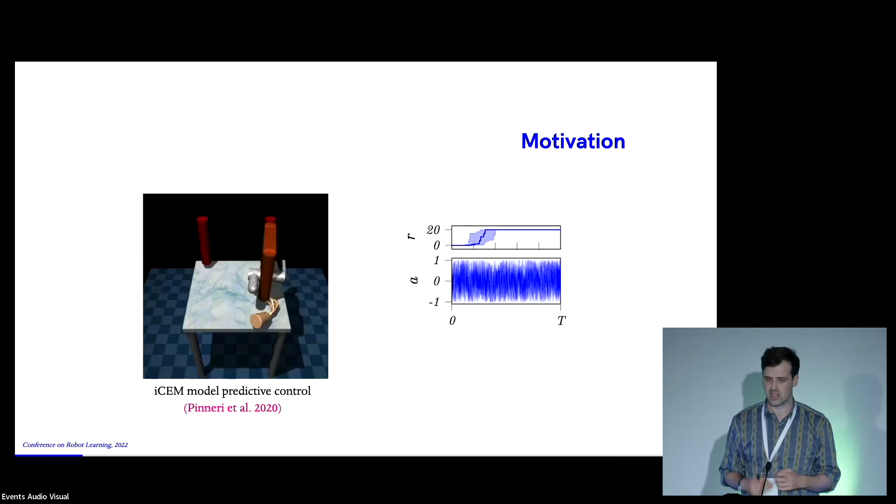So what we looked at in this work is bringing in Gaussian processes as a distribution over action sequences, using the correlations between actions in time to incorporate smoothness in the robot control during the optimization.

To explain where these correlations come in, I want to give a brief overview of how sample-based control works.

What we're doing is open loop control over a finite time horizon, and usually we specify some parametric action distribution. In order to explore, we sample from a joint distribution over action sequences. Here's a key detail: in this joint distribution is all the correlations that capture smoothness.

One key issue with a lot of implementations is that people make this independence assumption in time, which gives you IID random noise for exploration, and results in rough trajectories that you have to use for optimization.

Then in order to improve, you need some kind of weight per action sample. This can be soft weighting or hard weighting. Then to do the next iteration, you project these weighted samples back to a parametric distribution. This is the other key step, because in order to preserve this smoothness, you need to capture all the correlations from your iterates in this parametric distribution.

We take the inference perspective because it gives you a very elegant way of thinking about where these weights come from. And Takayuki talked about it a lot earlier. In the episodic setting, we're optimizing for the return.

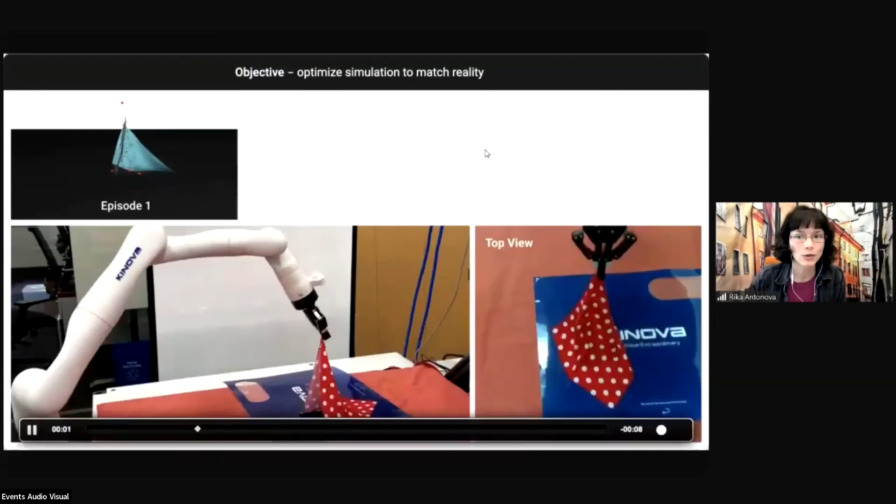In this work, we call for rethinking optimization with differentiable simulation from a global perspective. We consider a variety of optimization problems, including policy optimization tasks with highly deformable objects and liquids, as well as real-to-sim tasks where we optimize the behavior of simulated objects to match reality.

Our contributions are differentiable simulation environments with various objects and interactions, analysis of optimization landscapes and gradients, and a global search method for optimization on rugged loss landscapes.

We construct several new scenarios with rigid objects, a particle-based simulation with fluid, and mesh-based simulations with highly deformable objects. We also incorporate a number of particle-based environments from the Plasticine Lab that simulate plastic deformation.

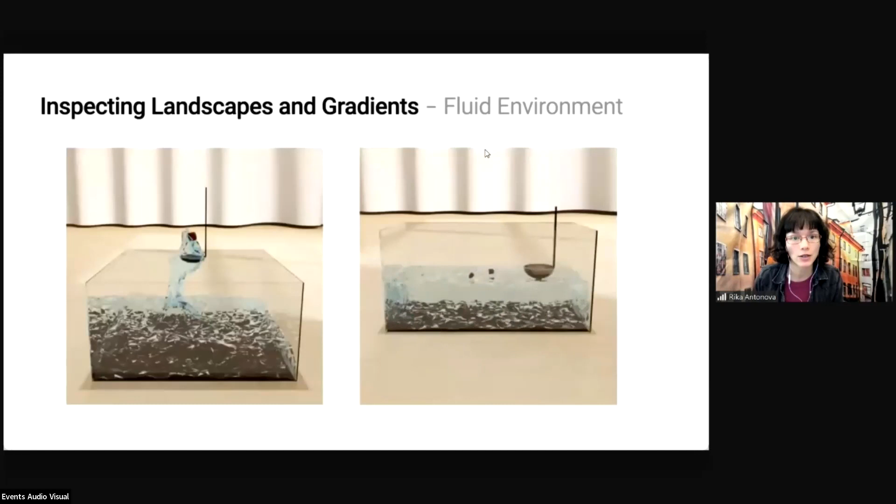We challenge the assumption that differentiable simulators provide easy optimization landscapes in sufficiently interesting scenarios. Our visualizations of loss landscapes uncover numerous local optima, as you can see here in examples from our fluids scenario. Here's an example of a landscape with flat plateaus, showing the need for extending gradient-based methods to have global search.

We propose an approach that uses Bayesian optimization to explore the loss landscapes globally. It models uncertainty over the loss using a Gaussian process and reduces the uncertainty by exploring unseen regions. At each global iteration, Bayesian optimization proposes the next vector of simulation or control parameters to try.

We treat this as a starting point for what we call semi-local leaps. We first sample a population of K candidates. Then from the best candidate, we compute the starting point for the gradient descent. The gradient descent, which we call the leap part of the method, proceeds, since on smooth loss landscapes it can make fast progress towards an optimum.

When the gradient descent reaches the local optimum, we again sample K candidates in a gradient-free way, from the Gaussian distribution whose mean and covariance are computed using covariance matrix adaptation equations. Then we again compute the descent start and proceed with the descent, and so on.

In the outer loop, we update the Gaussian process posterior for Bayesian optimization, and then Bayesian optimization selects the next point to try globally. It ensures we return to low loss regions to further improve within the promising areas of the search space.

In the experiments, we first show that gradient-based methods can offer significant gains compared to gradient-free approaches, such as CMA-ES. Here's an example with a 3-link pendulum that has to reach the blue dot.

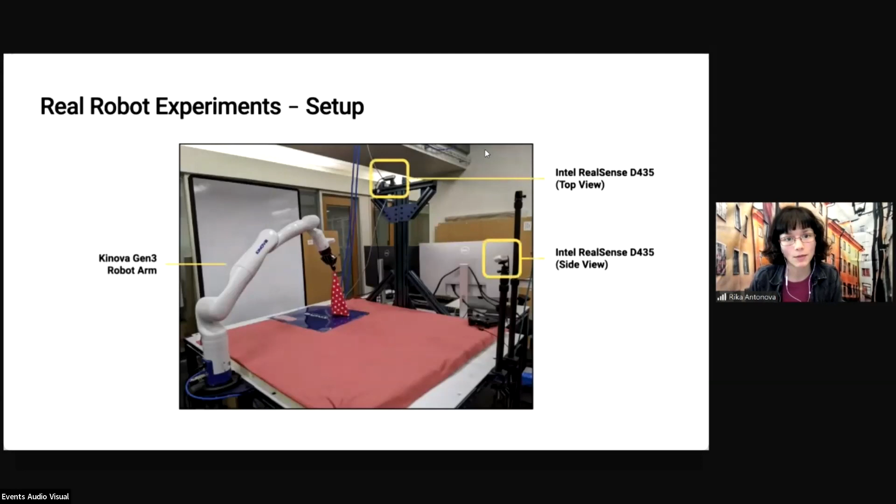Our setup for the real-to-sim experiments consists of a Kinova Gen 3 robot arm, two RealSense depth cameras, and a deformable object. Here the objective is to optimize the deformable cloth in simulation to match reality.

The loss is computed based on the distances to the four corners of the simulated cloth, which we also annotated in the real point cloud. Here's an extended version where we've increased the number of parameters to optimize.

Gradient-based methods can succeed in matching the overall motion for this highly deformable cloth.

Next we study the motion of cloth that behaves more like a paper towel when lifted, so it's stiffer. Here some dimensions of the loss landscapes are relatively smooth, but others can be quite rough in some scenarios.

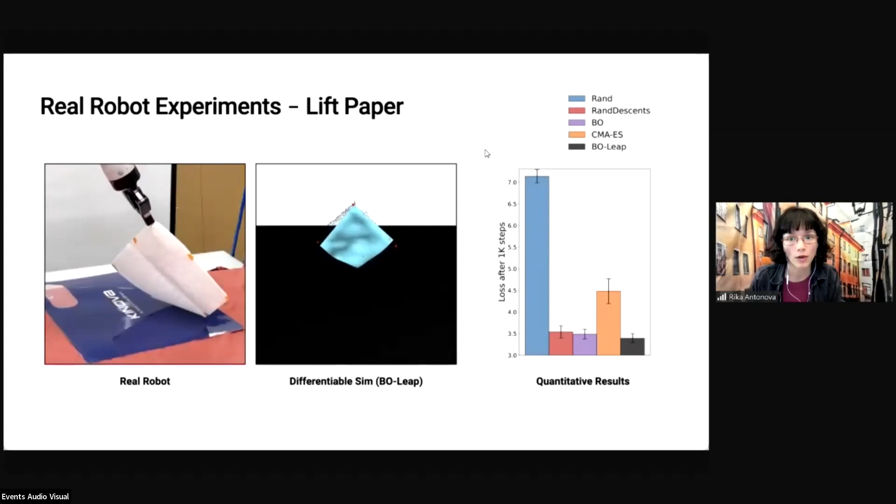Nonetheless, gradient-based methods can still perform well and find the parameters for the deformable that make it roughly match the paper motion. Here's also the visualization of the performance where we have the extended version when we double the number of parameters to optimize.

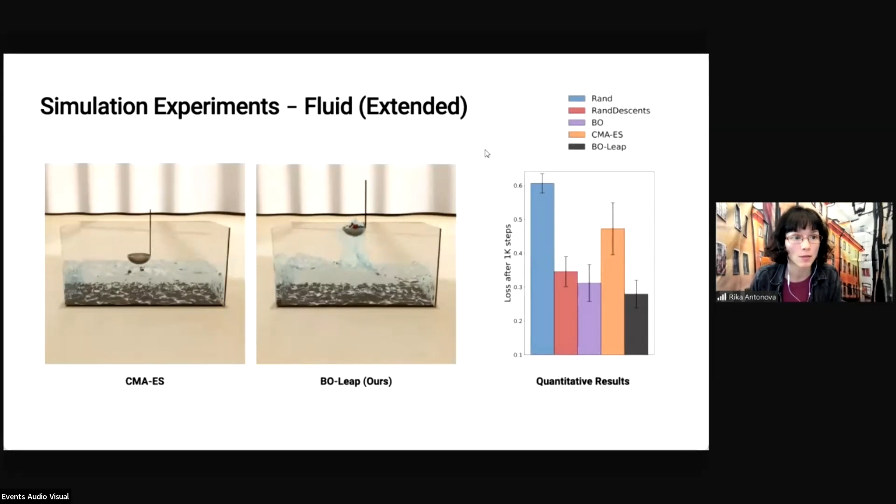Next, we study the fluid scenario where the goal is to lift up the sugar cube from the liquid. We also have an extended version where we lift up two sugar cubes. Here our method outperforms other gradient-based and gradient-free methods in this task.

The next set of experiments deploys the policies we optimized, but now on hardware. BO leap here lifts up both cubes in 7 out of 10 runs. BO is the closest competitor, Rand with descents, succeeding in 3 out of 10 runs.

CMA-ES could lift 1 of 2 cubes in several runs, but it failed to lift up both cubes in any run. It often also failed to lift even a single cube.

In these experiments, as you can see, we use a smaller container for liquid to avoid spills, and we use foam instead of sugar for the cube, but the motion of the cube in liquid is similar to simulation. So the setup retains the challenge of keeping both cubes within the ladle, and here we're showing an example of a failure of both tasks.

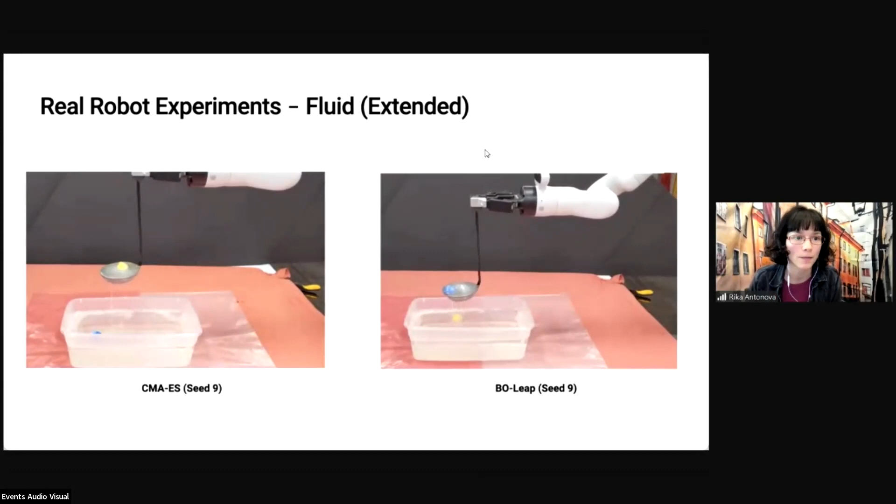Both of the algorithms. So we were asked to provide a kind of dirty laundry list. Our first note here is that we like the cinematic rendering, but it is slow.

So internally, we're using a faster renderer that gives us an idea of what is happening with the simulation, but of course it takes much less time to render.

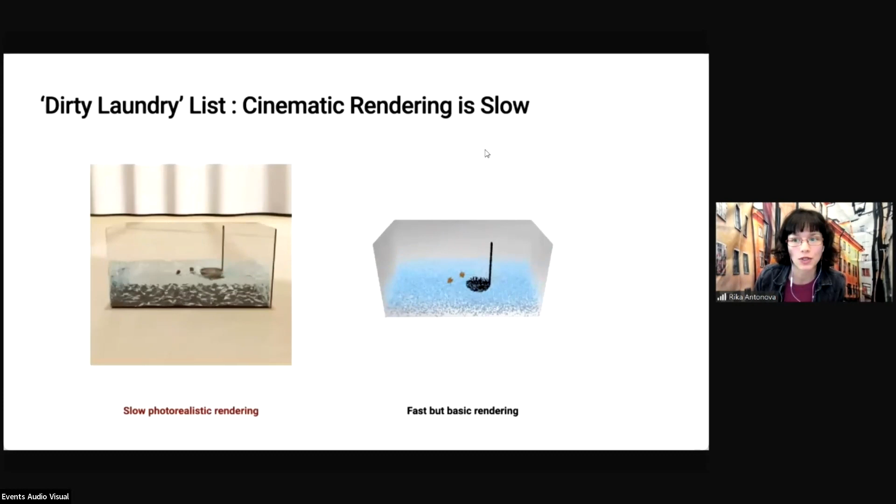From the algorithmic side, the biggest headache is that matrix decomposition for CMA-ES, BO, and therefore also BO leap, causes non-determinism. This can sometimes compound to basically have instabilities that result in plots that look different between runs.

For these slower environments, we can only afford to run 10 seeds if we have many environments to experiment with and many algorithms to compare. So rather than basing our conclusions on how algorithms perform in a particular environment, we now tend to look at the bigger picture of how things perform overall across a wide range of environments.

All right, so now the dirty laundry list is done, and there's still something to note, not really about our work in particular, but generally about differentiable simulators. The biggest challenges here arise due to difficulties in differentiating through rigid contacts.

With the pinball scenario, we studied this issue by varying the number of contacts, by changing the number of colliders in this game. And here's another example.

This time, the contact between the rigid and highly deformable object yields a rough landscape and low quality gradients, despite the fact that the dynamics of the environment appear well behaved.

So overall, to summarize, the messages we would like to communicate with our work are as follows. The first takeaway is that well-behaved dynamics does not necessarily yield smooth loss landscapes and useful gradients.

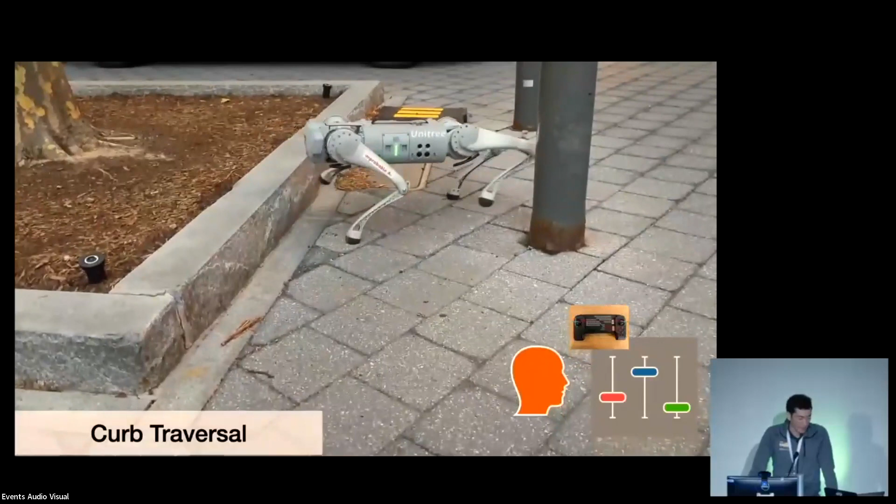Thus, when we take MOB outdoors, a human pilot can take a few attempts in the new environment to find a successful behavior in the parameter space.

This idea holds promise for piloting the robot in situations that are hard to simulate, like thick bushes and complex terrain.

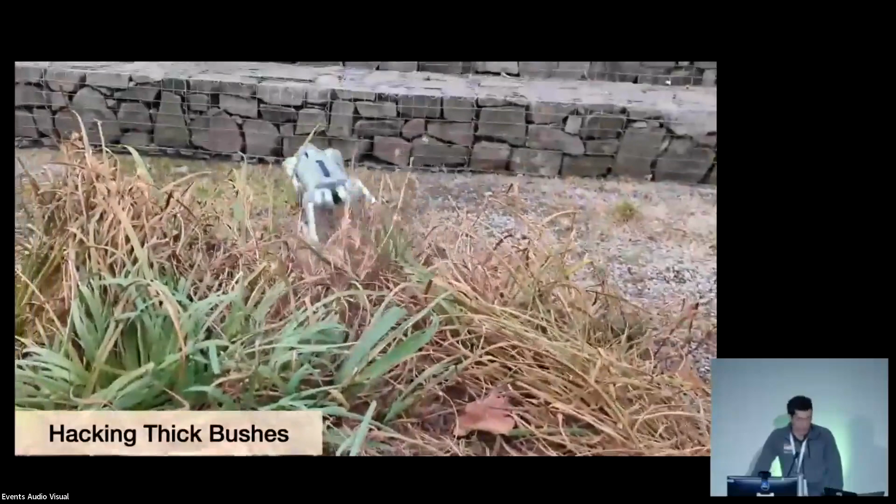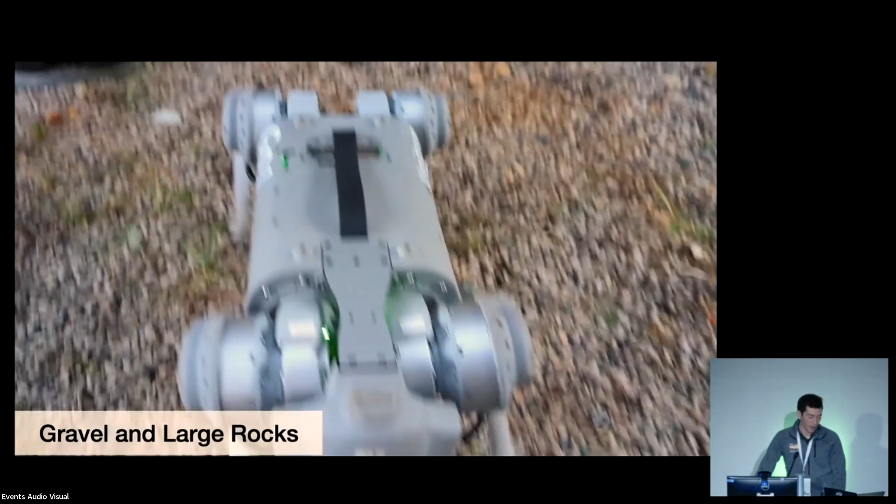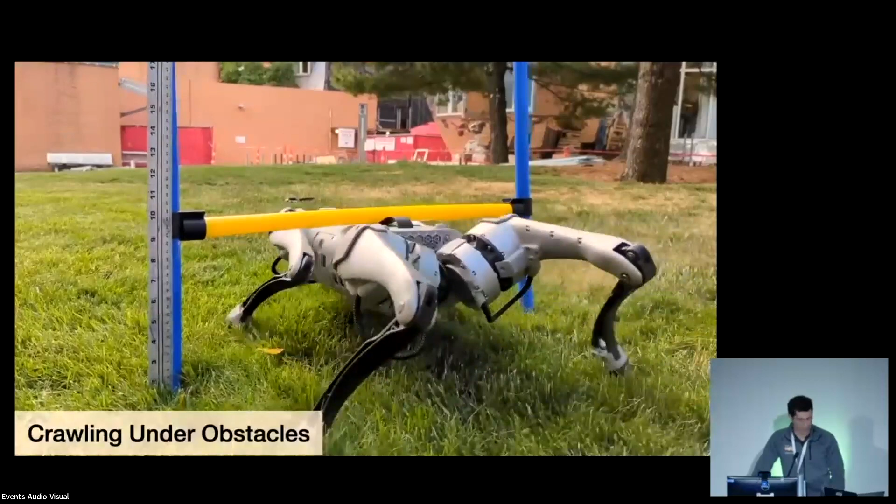Until now, we have shown that MOB can learn diverse behaviors for a single task. Now the question is, can we transition from skill 1 to skill 2? The answer is yes. We show that MOB learns to compose multiple behaviors in sequence. By the way, this is a natural consequence of learning continuously parameterized behaviors in a single policy. We don't need to do anything special during training.

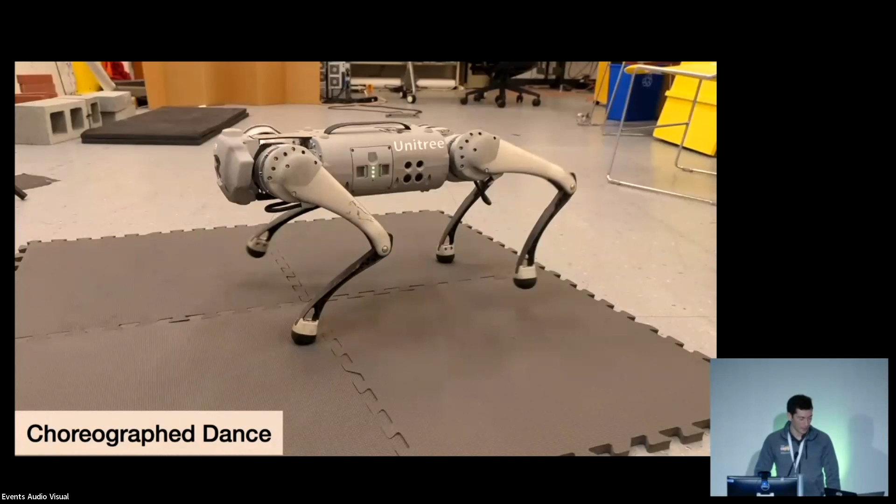This even serves to compose motions with precise timings and high speeds. Here, the robot's foot contact timings are precisely choreographed to music. Sorry, there's no audio on this one.

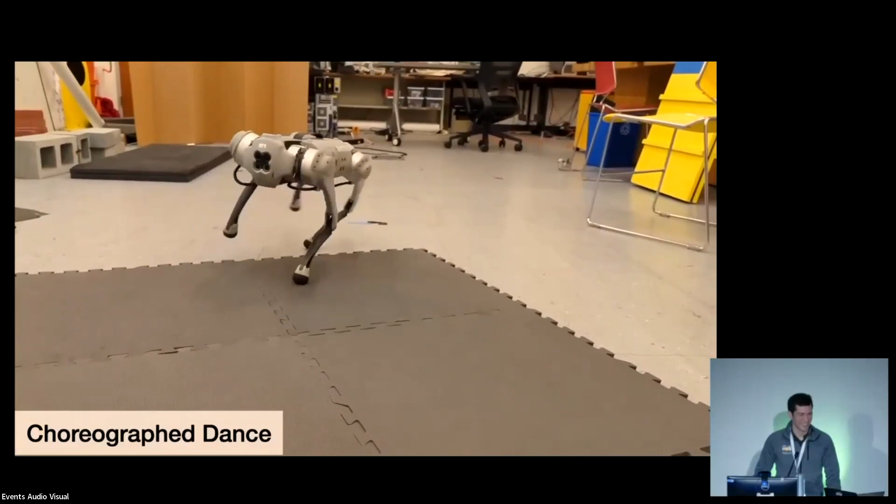So, what are our takeaways? First, MOB provides a procedure for learning a structured space of locomotion behaviors for each locomotion task. The diverse behaviors learned by MOB impact performance in unseen environments, sometimes improving it.

This is further validated in our paper by a set of simulation studies. And finally, we train the many gaits in a single policy. Previous works have reported this to be challenging. It enables online composition of behaviors.

But no CoRL presentation would be complete without acknowledging our dirty laundry. Of course, a human pilot was required to guide all of the adaptations shown in our videos. Future work could select behavior autonomously using imitation or self-supervised methods.

Second, a human designer needs to specify the behavior space. MOB is of benefit specifically in settings where this is easier than designing and tuning improved environment models that represent the real world better. Finally, there is a limit on how far we can adapt using multiplicity alone.

We can only choose from the space of policies that perform well in the training environment. These tuned gaits could be combined with continued fine-tuning on real-world data for increased performance.

If these sound like interesting challenges, the good news is that you can help us overcome them. Our code is open source, and users have already reported success running it. This concludes my presentation. Thank you for your time.

Very cool, very cool. Before we get to the questions, I have to say I'm still amazed that you let your robot roll around in the sand. That is just nuts. How many robots broke that way? We fixed it a couple times. But okay, they've survived, just twice. Yeah, yeah, go ahead, Carol.

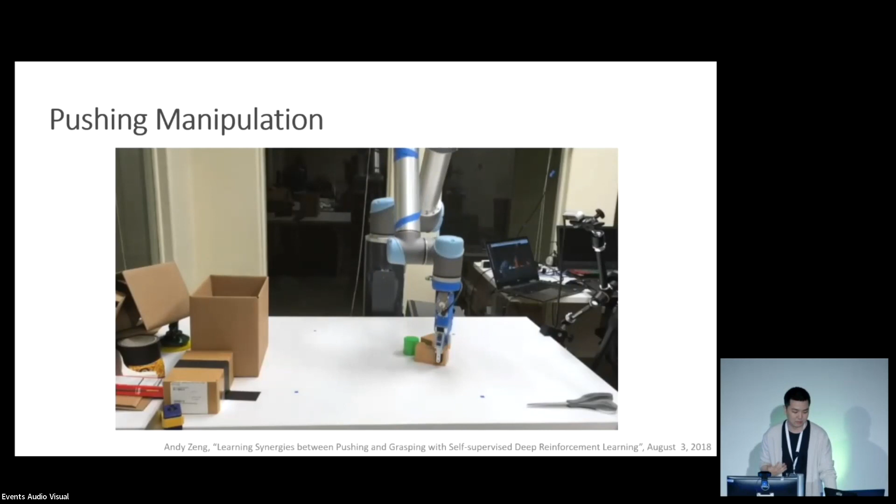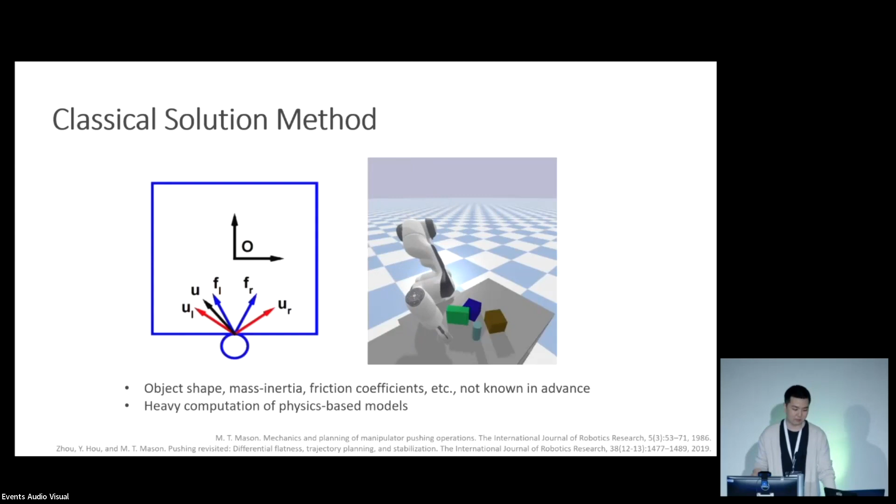The classical model-based method of solution would be to identify and locate the objects and use our knowledge of physics or mechanics to push the objects so that they can be manipulated. The problem with this approach is that the shape, mass, inertial properties of the object, as well as friction coefficients, may not be known in advance. And in some cases, real-time motion planning may be difficult due to the heavy computation of physics-based models.

To address these shortcomings of classical model-based methods, several data-driven methods have been recently proposed. These methods take as input a visual scene ST involving multiple objects, together with a user-provided robot pushing action AT. The output is then the next scene ST+1 of the objects after they have been pushed by the robot.

Recent methods differ in the choice of visual input and deep neural network architecture. Compared to classical model-based methods, all these methods have the advantage of fast inference and do not require prior knowledge of the object and the environment.

However, after we carefully compared the performance of these and other data-driven methods, we found that their generalization performance to be less than satisfying, and they require large amounts of training data.

One way to reduce the amount of the training data is to use a network that is equivariant. We now explain what this concept means.

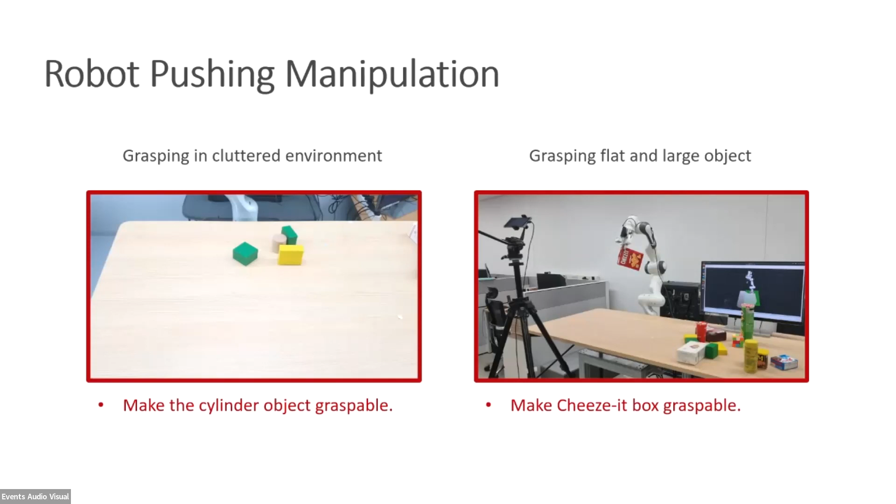So here is a discussion of limitations. First, currently, it is not trivial to apply this directly to more complex and non-convex shapes. Especially, defining the shape parameter is not a trivial problem.

Second, there could be some situations where the SE2 equivariance does not apply. In this case, our approach can be detrimental.

Finally, different mass distributions will lead to different motions, especially when the objects interact with each other. In this case, the dynamics prediction task using only vision data becomes challenging.

So finally, here is a summary. We have proposed an SE2 equivariant pushing dynamics model, and we confirm that our method significantly outperforms the existing visual pushing dynamics models.

And finally, we have verified that our method can be used for various pushing manipulation tasks, especially for assisting grasping tasks. There are many more interesting topics discussed in our paper, and we invite you to take a closer look. Thank you for listening.

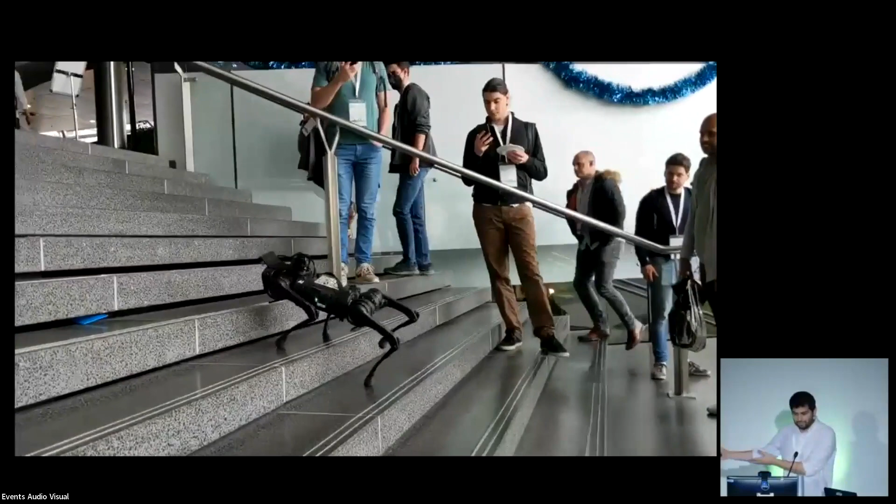Before I start, let me ask you a question. Apart from the dirty laundry list, what is the next most common thing you have seen at CoRL this year? You can think about it. But for me, wherever I go, I see legged robots. They are there on the stairs, they are there where the food is, they are sitting here, and they are there in every talk, almost every next talk.

So a lot of progress has been made in legged robots, and they can walk outside, walk in forests, walk in water. So the question is, what's next? How do I use this robot to do anything more useful? Just locomotion is restrictive, in the sense that they can walk around, do inspection, but I cannot do any manipulation with that.

So the next step here is to add an arm. Have a robot with an arm on top, and legs increase your reach. The arm helps me manipulate in the real world.

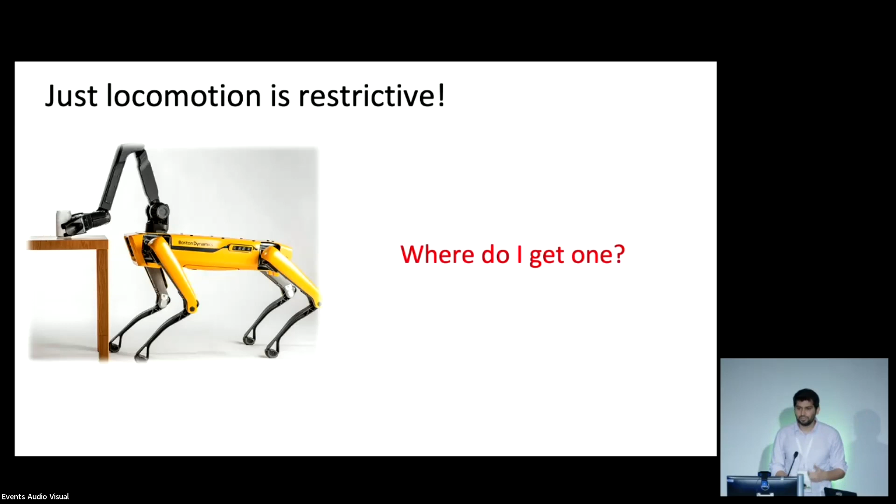Good, okay. So where do I get this robot? We went online, tried to look up the existing models, and it turned out the price tag is so expensive, we cannot afford these robots, especially in academia, or can afford only one in our career. So here is a Spot from Boston Dynamics with an arm, costing over 100K. Another one is from ETH, the Anymal robot, not on sale, not commercial yet.

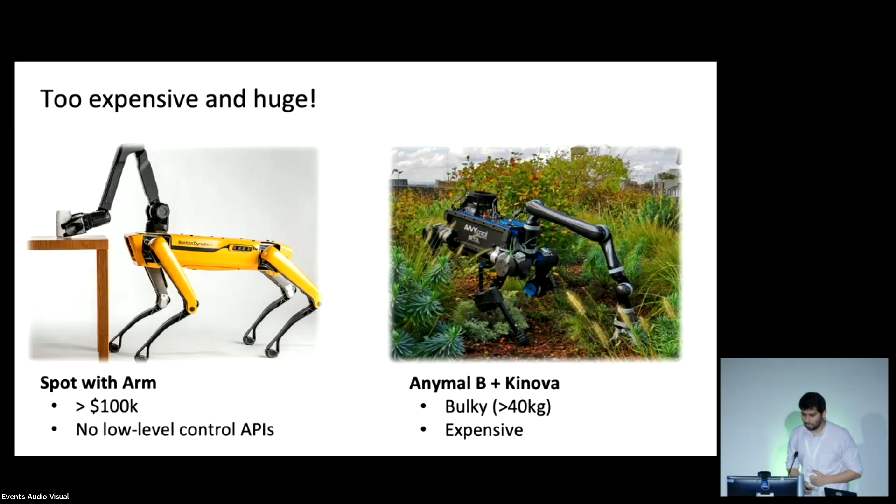So what we did, we thought, okay, let's buy the cheapest legged robot out there, the cheapest arm out there, and put them together in a custom setup. So here is our low-cost legged manipulator, and you can see the details here. It cost 6K, which is an order of magnitude less than the comparative robots.

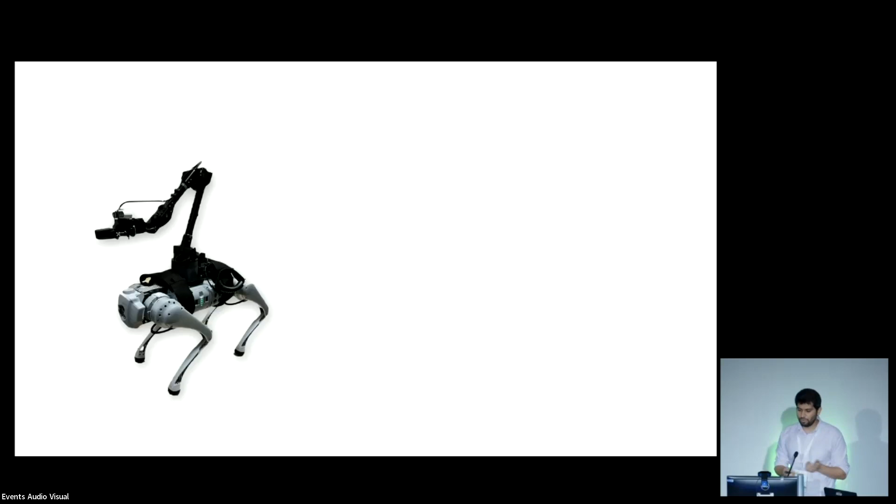Now, the interesting part is with this platform, here comes a new challenge: you have to now control both legs and arm together. This problem in literature is called whole body control. This is an area where lots of work has been done in the controls literature for the last 15 or so years.

But this introduces new challenges. First, I have significantly increased the dimensionality of my robot. It's no longer just 4 legs, 3 motors each. We have a full arm on top, gripper, and all this. But the bigger problem is this introduces an obvious local minima in the problem. If your legged robot, the legs want the top to be stable. For them, it's best when the arm does not move. For the arm, the base should be stable. It's best when the legs don't move. So they compete against each other.

There are a lot of approaches in the literature which are based on optimization. If you open their method section, it looks like this: lots and lots of modules, one module for arm and then one module for legs. And then you have to somehow engineer a new optimization to put them together afterwards. This requires a lot of effort and may not always get optimal behaviors for you.

So the question is, in the spirit of learning for robots, which this conference is about: can we design a single policy? Can we learn a single policy to control the whole body of this robot? Before I go into the results or the approach, let me show you some examples here.

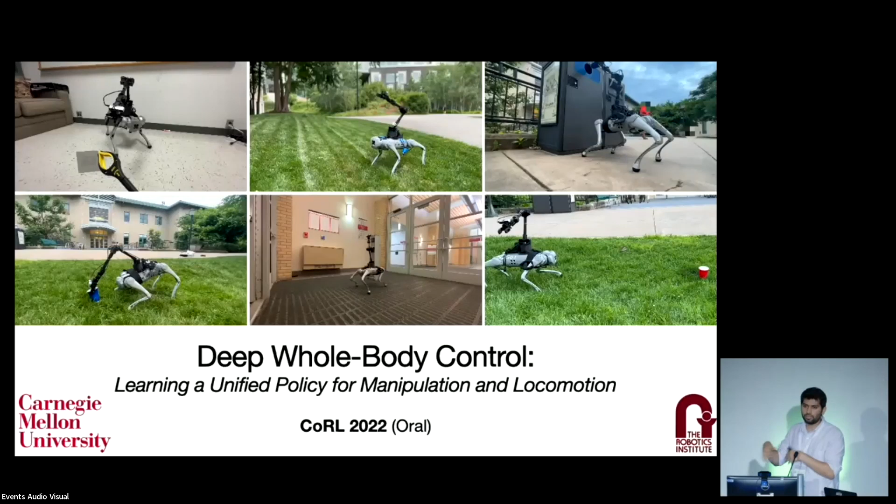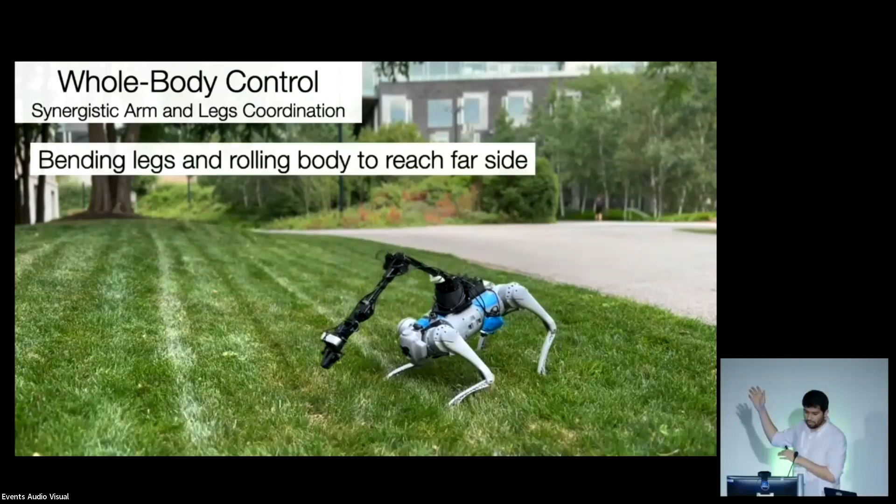What do I mean by that? In all these examples, the human will only command the end of the arm, and the whole body has to account for this at a very high frequency. If you notice this robot here, the human is commanding where the arm should go, and you can notice the legs can bend automatically. The body rolls sideways as you move the arm to the sideways, so the arm can reach much farther than it could reach otherwise.

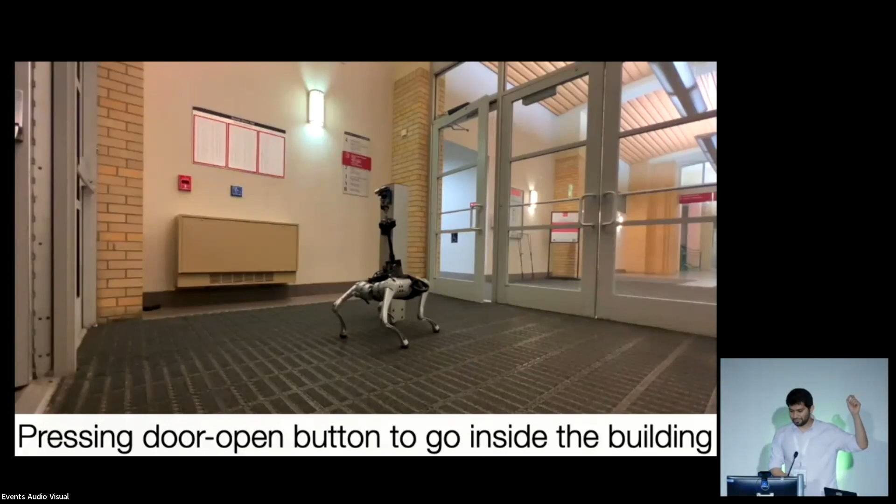Here, the human is controlling the arm end effector. The shakiness you see is because of two reasons: the arm is very low cost, and humans are bad at this kind of thing. So what we are showing here is an example where the arm is moving while the legs are walking, and it is stable in those situations as well.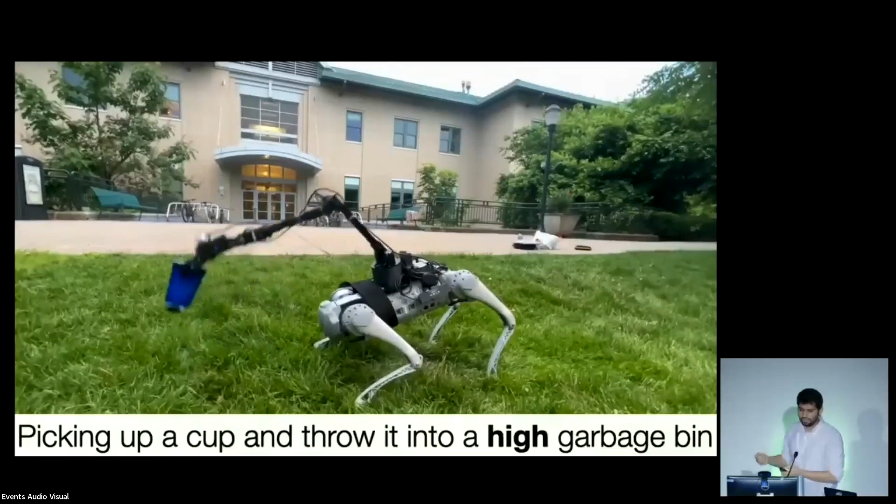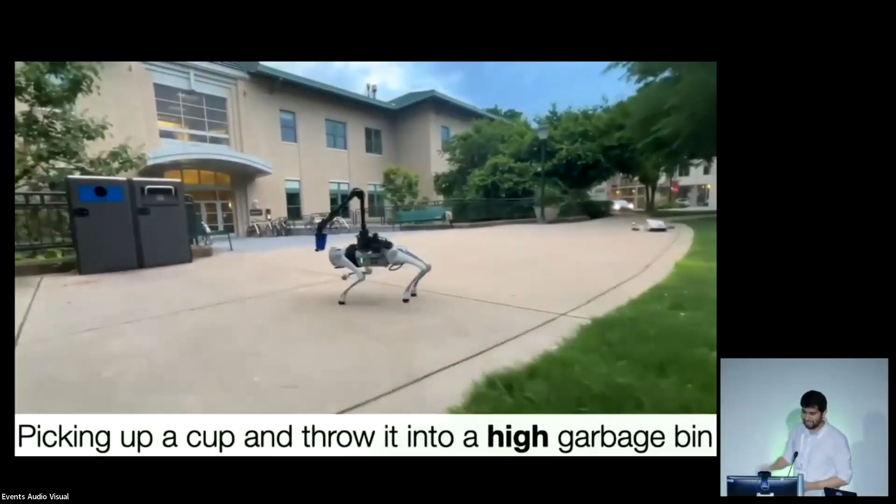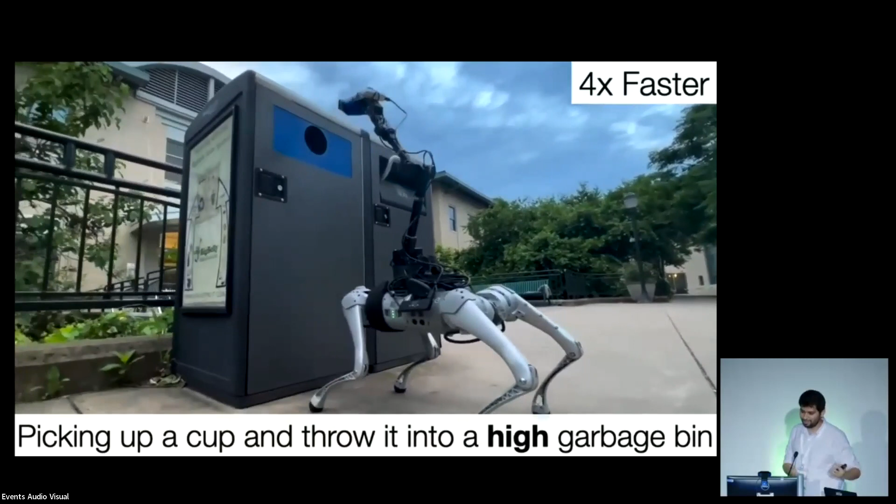Here we tried to test the limits of human ability to control the robot with the end effector. You pick up something, try to put it in the trash, and the robot can walk and do the whole body control. But again, the human is not very precise and the arm is not very precise either, so we are showing dirty laundry in the talk itself. It takes time for the human to align the joystick.

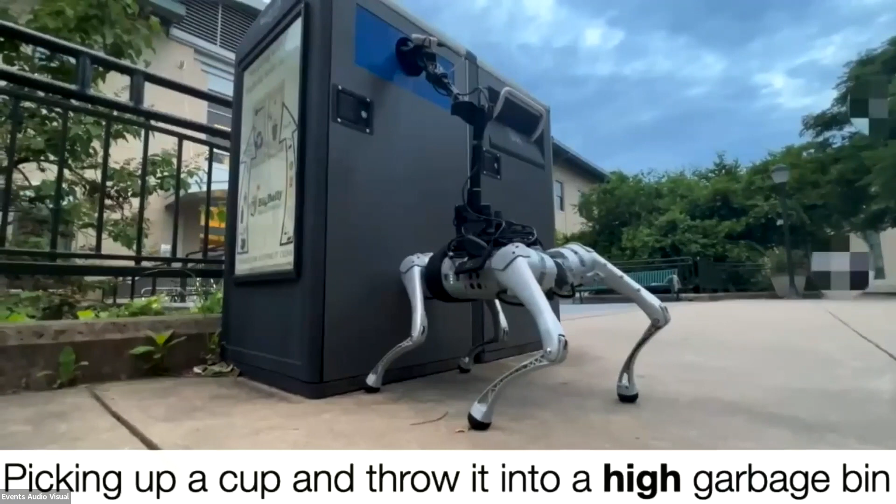Legged robots are everywhere, and the approach that you find, which is common across most methods, contains this two-step magic process. First, train a policy in simulation from some privileged data, like whatever is available. In step two, distill this policy into something via supervised learning from information that is coming from onboard sensing, so that you can deploy it. To give an example...

In this case, in phase one, you can train a policy with some privileged information like mass, friction, height, etc., and you learn this policy. In phase two, you distill this policy into a supervised process from the history of the robot. This example is from our previous paper called RMA, but other approaches can also fall into this category.

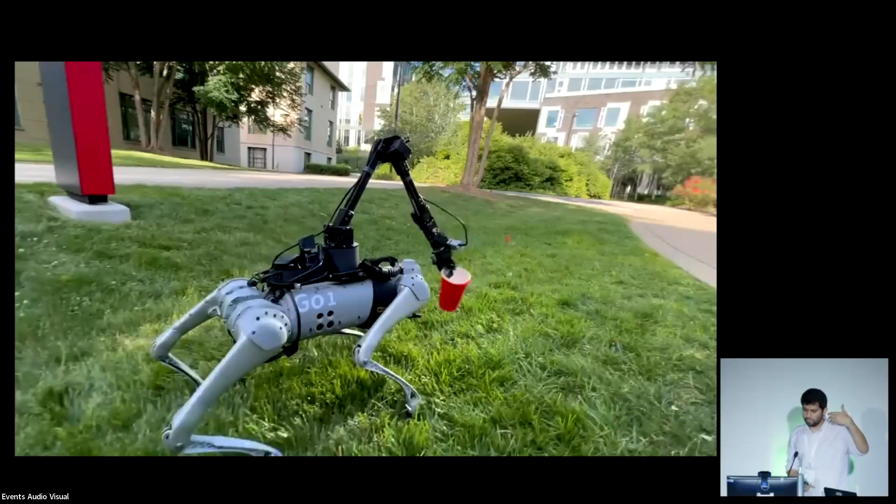Now, what happens if we just apply this approach to whole body control? We just take the same method and apply it here on arm and legs. It does not quite work. When you put this in the real world, sometimes the legs work, but notice here there is a slight slope. You cannot see it in the image very well, but here the robot is trying to go forward and the arm is stretched out, and it is not able to move forward because of the weight on top of it.

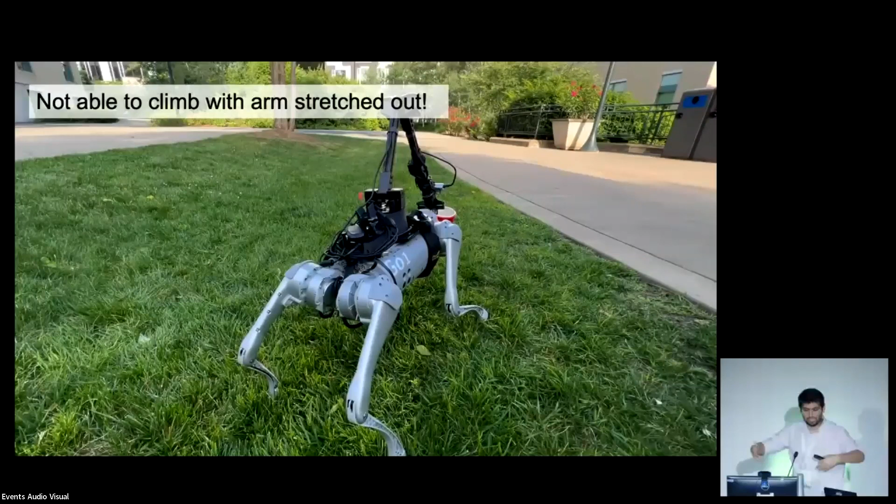And there are many more failure examples like this. So it does not work. So what is the issue in this approach?

So to fix this, we perform a very simple trick. The idea is, why not combine phase one and phase two together, and learn to compress while simultaneously making sure that your compressed vector is also close to the one coming from the history or any other data. So you train phase one together with phase two, and phase one is trained to perform RL while simultaneously trying to make sure that the latent is close to the one coming from the history of the robot. We call this approach regularized online adaptation, ROA.

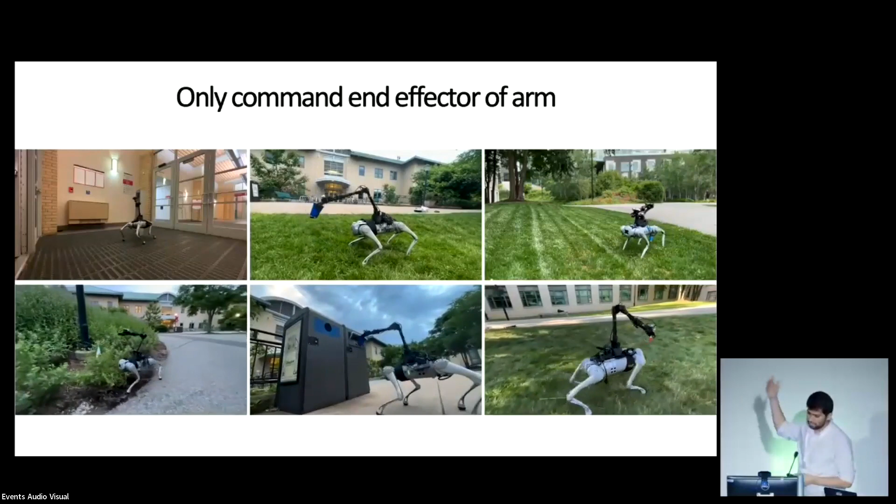So this is the method. And then we just deploy this policy in the real world as usual, from history of the proprioception on the robot, and this is what leads to all these results. Here are some more examples of the same robot doing different tasks with this whole body control.

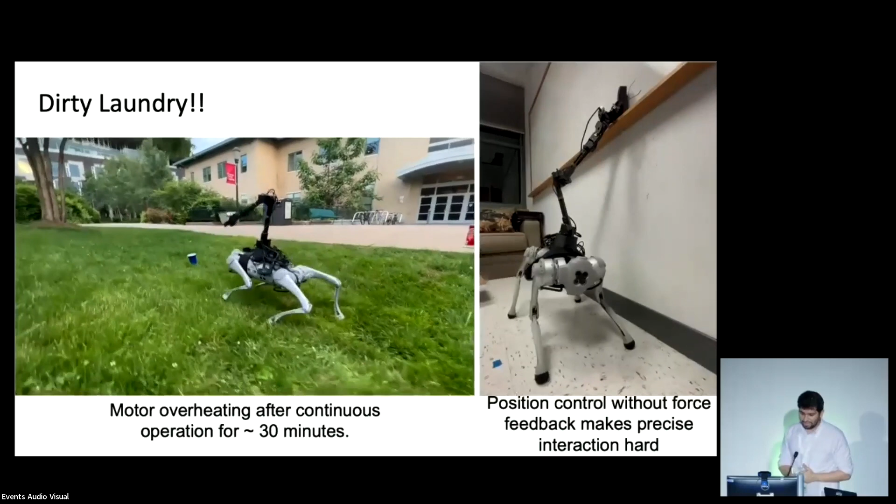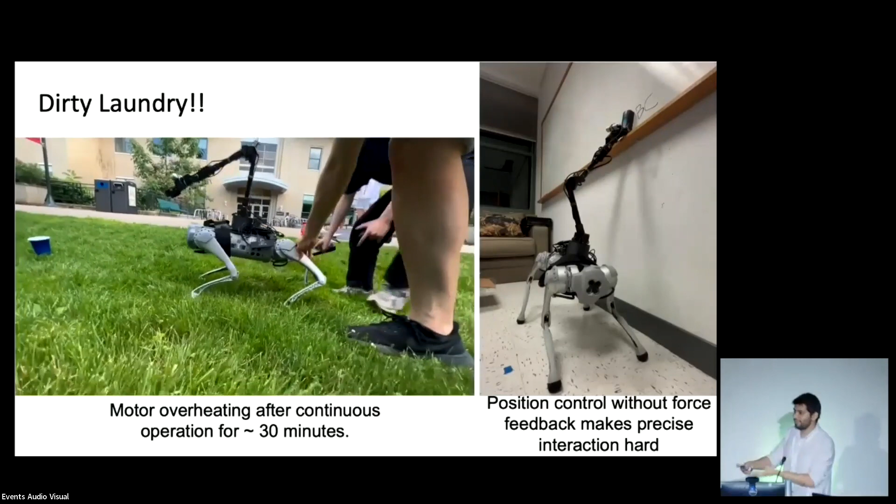So let us see some dirty laundry. This is primarily coming from the fact that the hardware is very low cost. If you see on the left, the motors heat up after 30 minutes, and you may have to push the robot to walk forward because the motor doesn't have enough power. So the more you run the robot, the behavior changes. And on the right, since we are doing position control, it's not very good for fine-grained tasks in this scenario.

So now, since we got the robot all the way across the world, we thought we'd show you a demo live as well. Here the end effector is being controlled - you can see how the legs are bending forward as you move the arm to left and right.

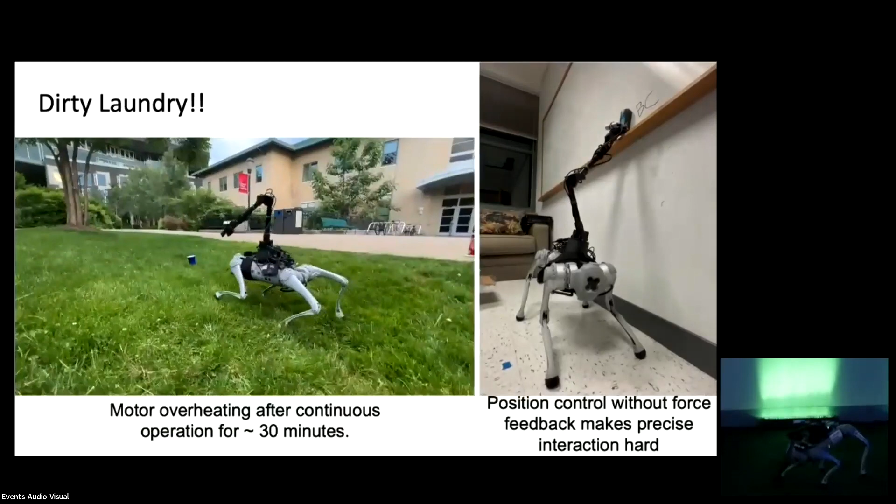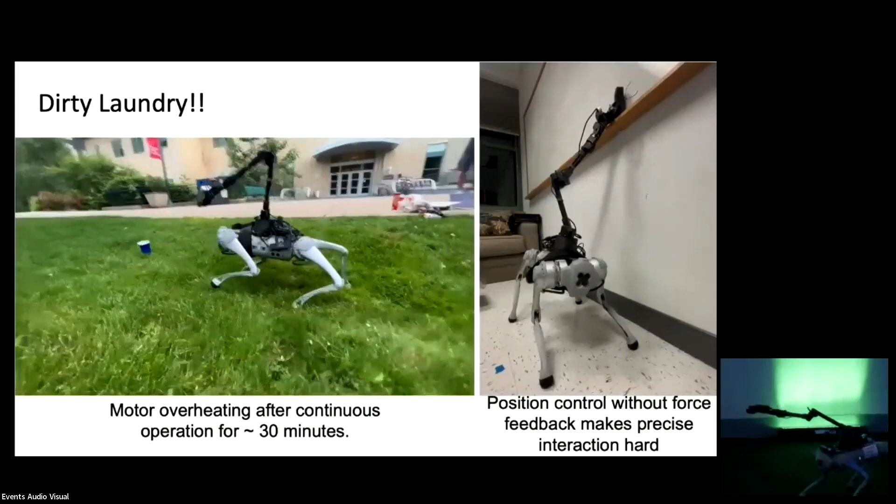You can see that these are not the authors of the paper, they're not well practiced in how to use it. But if you take the arm to the left or right, it tilts to the right, tilts to the left. And if you take it up, all the way up, you can extend the leg and effectively increase the reach of the arm.

But I can take questions. So this is, thank you. This is the last slide.

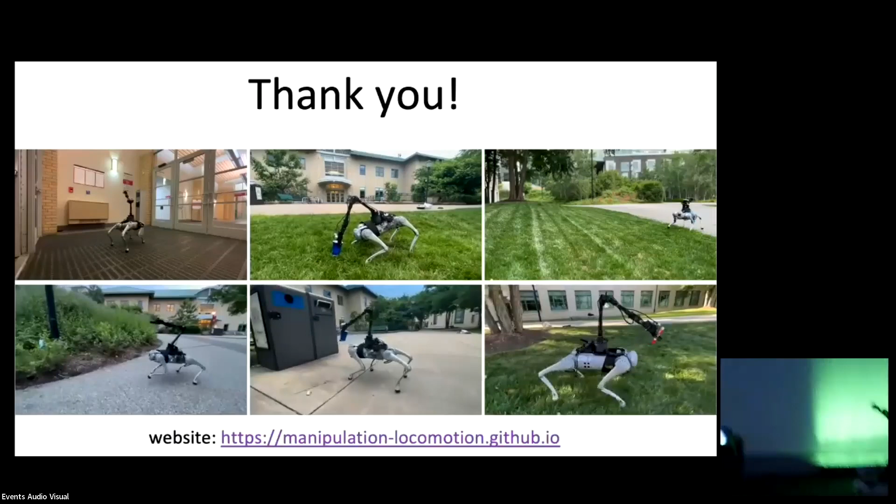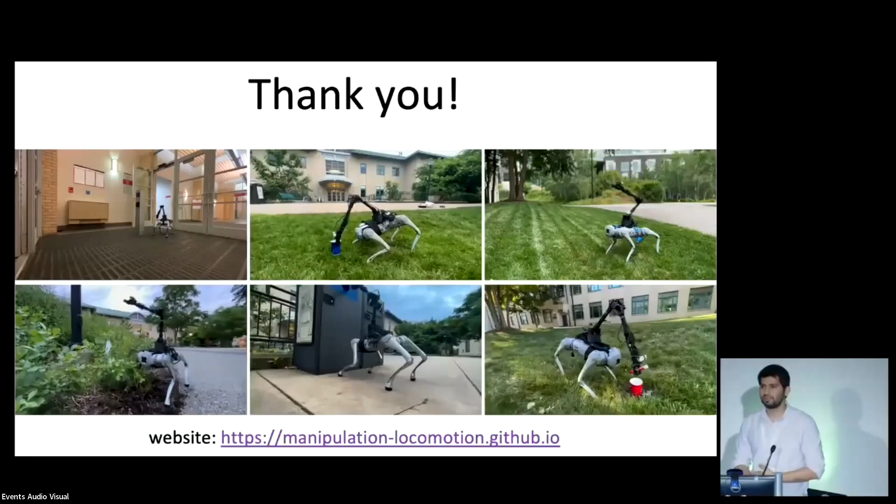Hi, great presentation, I really liked it. My question is that some tasks require careful and precise movement of the arm, such as clicking a button or putting trash into the garbage can. But other tasks probably require more extensive use of the legs. How does the advantage mixing account for this? And what would you do to improve precision for the tasks that you can do?

Yeah, so this is a very good question. One thing I didn't say in the talk is that this whole training is currently agnostic to the end task. Think of this controller like if you buy an arm from Franka Emika Panda, it already comes with a controller inside. For any task, this controller works, it's designed for any task in the end. So now we have yet to design a mid-level policy that can do position control to perform tasks, and that's where we use humans in this work. But advantage mixing allows us to make sure that for any configuration of arm or legs, it can reach it if it's physically possible. So if the arm should go somewhere, the legs can make the robot walk and then take the arm to that corner. You don't have to worry about any low-level control like you do with the Franka arm. It's a replacement for that, for this legged arm system.

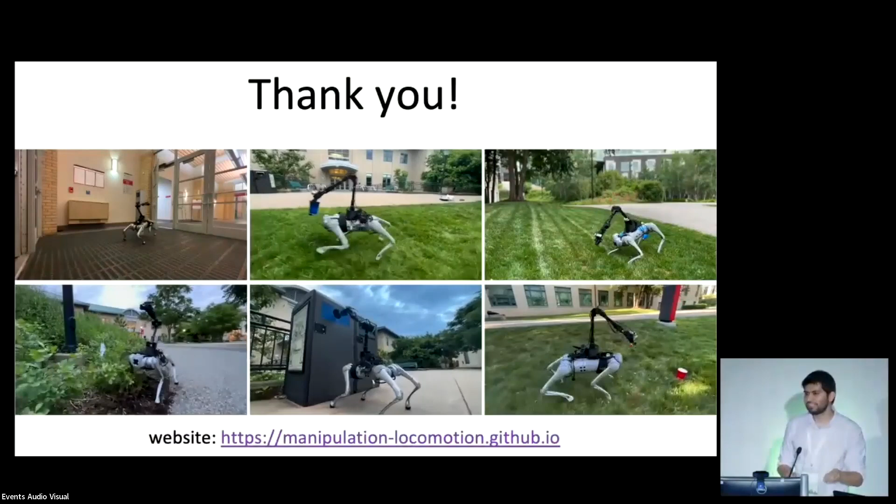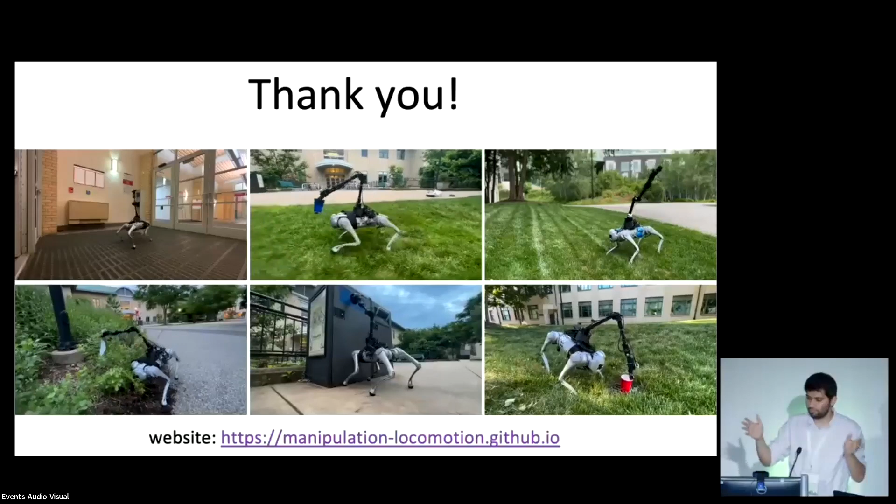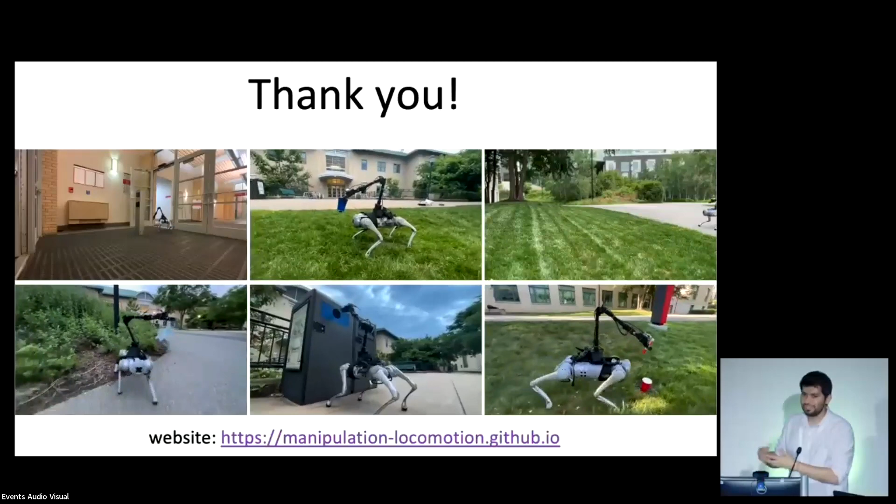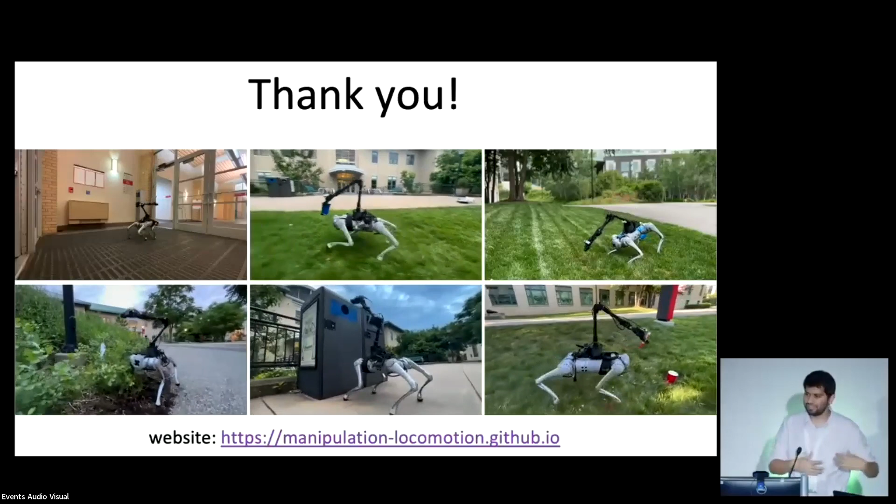So the thing is, when you try to directly predict the actions, you're trying to solve two problems at once in the beginning: the estimation problem and the control problem. And the control problem here is very hard. So by having the Z vector, we separate these two problems into estimation and control. Then regressing the Z vector gives us an advantage, like I showed in the dirty laundry example, the robot heats up as it walks. When it heats up, the CPU gets slow and your system has to be asynchronous at that point. You can't assume your history is being processed at the exact same rate at all times as you're walking. This separation of the latent allows us to take advantage of that, so it's completely asynchronous. History can come at any time, and you can use the latest latent and work from that.

There's another question from online. What's the next step for quadrupeds? Is it training a high level policy, adding a second arm, or something else?

So this is what the motivation of the talk was. I hope this is the next step for quadrupeds, or the beginning of it, where you have an arm and can put these platforms inside your homes. This is a very small robot and very safe, as you saw here, so you feel safe around it. But all the other robots which have an arm on top are big and scary, like the B1 robot over there, I feel scared around it. So the next step I hope is that you take such platforms and put them in homes to do all sorts of mobile manipulation, like go up the stairs, take your beer up the stairs, not bring the beer to the same floor as the same person. You can do all sorts of things, but hopefully this is where it goes.